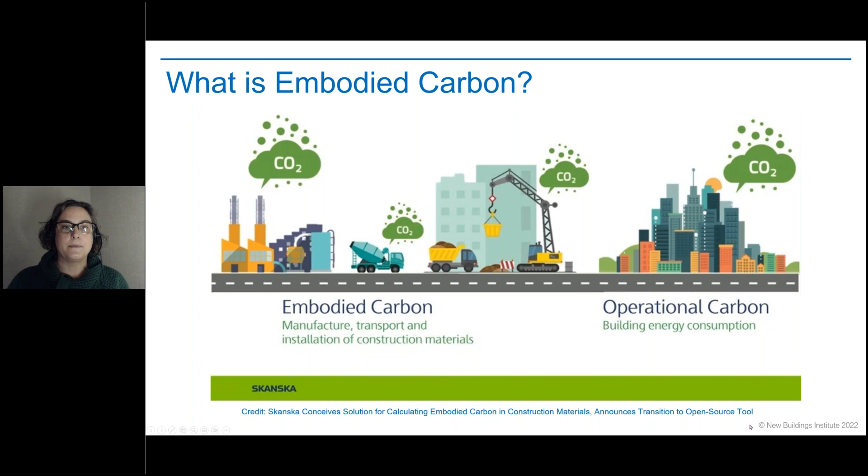So let's jump in. Most of us know that buildings account for about 40% of global GHG emissions. That value includes embodied carbon emissions, which is about 10%, maybe up to 15%, and operational emissions, which is about 30%. Operational carbon is usually pretty well understood by those in the high performance building world.

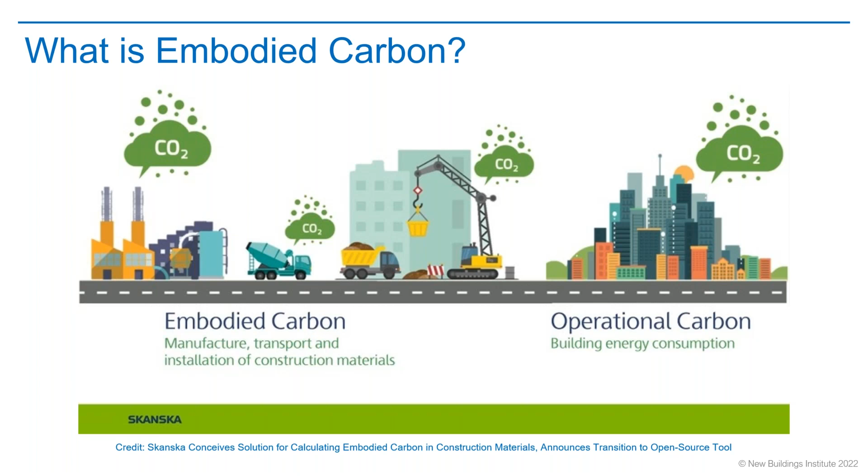Embodied carbon is the sum of all the emissions associated with the extraction, manufacturing, transportation, installation, and end of life of a material or product. So that's the difference between the two.

But when we talk about embodied carbon, it's not just the emissions associated with the development of a product. We also want to consider the emissions associated with installation, maintenance—which could be like refinishing a wood floor or concrete floor—and emissions associated with replacement or product disposal.

This chart uses an EU standard, EN 15978, and shows the carbon associated with all phases of a building's life cycle. This is to show that we're not just talking about upfront embodied carbon, but the whole life cycle. Starting at the top, the stage indicates the stage of life for a building project.

The module indicates the phase within the stage. For example, with a product, there are two stages. In that red and orange, you can see that there are two stages there.

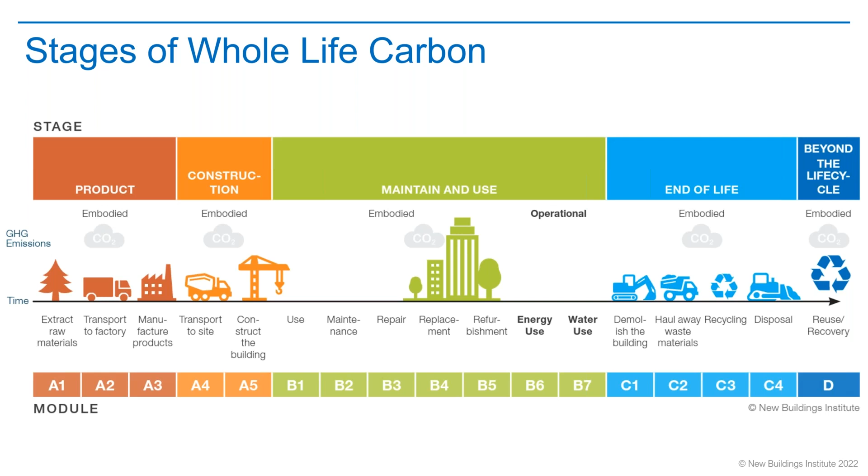You may hear someone refer to a product's embodied carbon measuring the cradle to gate emissions, and this identifies the boundary conditions. It's the same as saying the product stage, or modules A1 through A3. So there are a couple different ways to talk about it, and it's important to be aware that there are different terms out there that mean similar things, and it could be very specific.

So what materials are the biggest contributors to embodied carbon we should be concerned about? Generally, structures make up the largest part of the embodied carbon pie. For those familiar with the book How Buildings Learn, it's a great book, highly recommend it.

You probably understand that within the building's life cycle, there are different components. The structure is replaced the least and the interiors are replaced way more frequently. So we need to consider the life cycle impacts and the replacement timeline, not just the initial products, for a new construction project.

Once you understand that aluminum is essentially congealed electricity, and that bio-based products like wood are lower embodied carbon, you can start to consider lower carbon materials. But we still need some of those high carbon materials like concrete and other metals.

So the text to the right here, we're not going to walk through all of this. This is more for reference. It's a great little resource that provides some actions that designers can take.

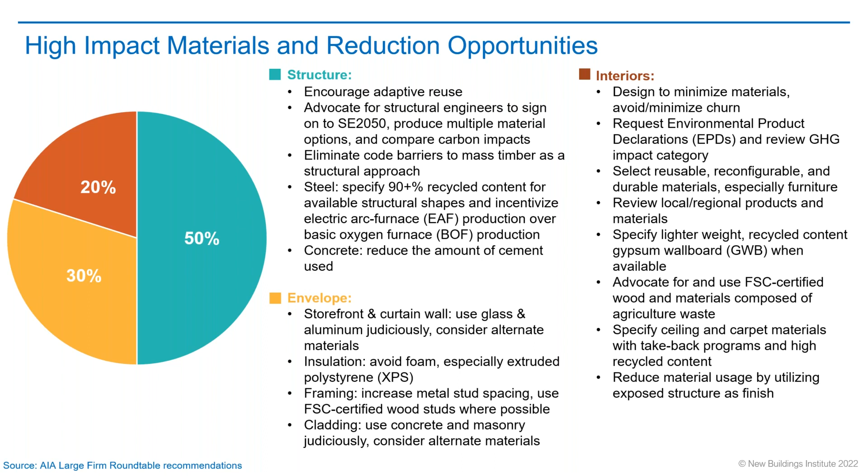So there are 3 things on this slide, but there's one huge thing that's missing, and that's mechanical, electrical, and plumbing. I'll get to that in just a minute.

So this chart from CLF, Carbon Leadership Forum, and AIA looks at operational carbon in 2 scenarios and embodied carbon in yellow. There are 2 different building types in blue. The lighter blue is a code compliant building, and the darker blue is a high performance building.

And code compliant buildings often have a higher operational carbon compared to embodied carbon, where the reverse is true for highly efficient buildings. So when we compare the operational carbon to the embodied carbon, the upfront embodied carbon relates to the construction and occurs at milestones.

In this scenario, we have 0, 15, and 30 years. During the construction and at major renovations, we see those tenant turnovers, so that's why we have more embodied carbon at those points.

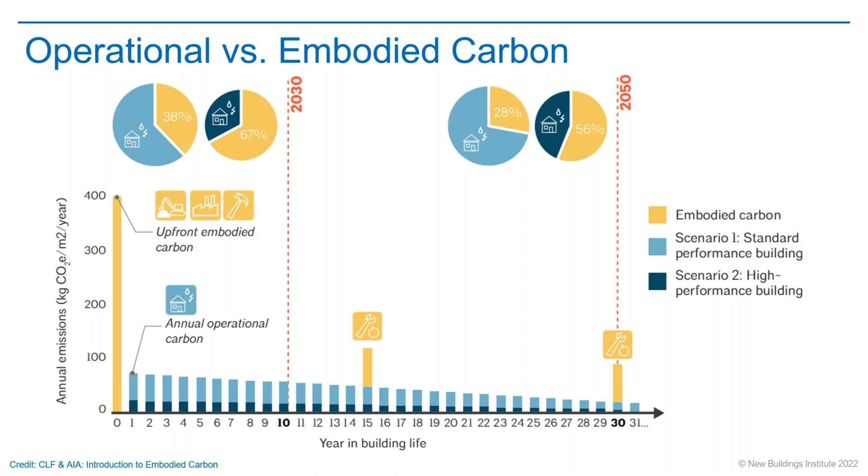Operational carbon is flexible, so it can be reduced through energy efficiency measures by using lower carbon energy, unlike embodied carbon. So as with embodied carbon, we want to address that upfront before we even purchase anything, because we can't really put those emissions back into the machine after they've been released. So we need to address them early.

And regardless of building type, size, or location, there are 2 materials that dominate nearly every analysis, and that's concrete and steel, for commercial buildings I should add.

Steel in the US accounts for about 2% of US emissions and 6% of global emissions. Of the US emissions, about half of the steel goes into buildings, into the built environment specifically. And concrete accounts for about 8% of global emissions, nearly all of which is architectural or infrastructure related.

But when addressing energy efficiency, we always start with the largest energy consuming end uses. It's a pretty familiar idea within high performance buildings. Similarly, with embodied carbon, we want to address the materials that are used the most and have the largest carbon footprint.

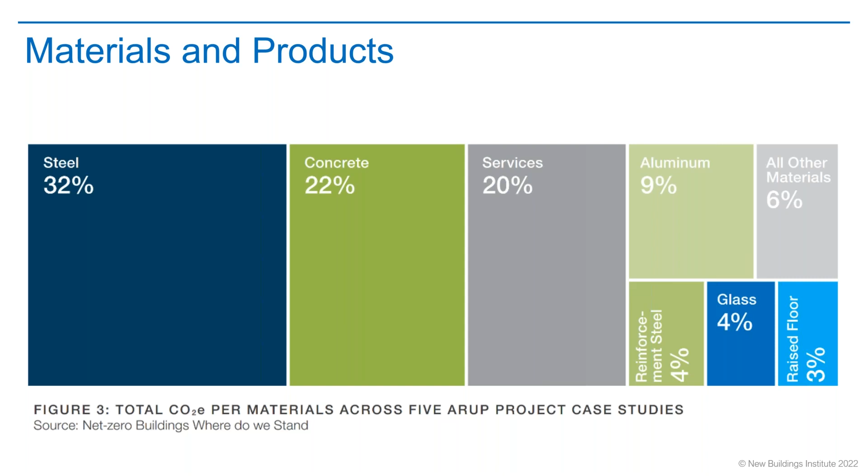So if you're familiar with Buy Clean policies, it follows the same idea. Those are the higher carbon products that are being addressed first. So in California, that's looking at steel, glass, mineral wool insulation. And we'll talk about that in just a moment.

Now, I don't want to pick on any one material, specifically concrete and steel, because they always seem to come up in conversation because there's a lot of opportunities there.

But we have other products like mechanical, electrical, and plumbing, or MEP, that can reduce their emissions either from material efficiency, being efficient with how they design the system itself, and then just by identifying the different systems that are being used.

So this ARUP study—the slide before that I showed was the ARUP study, I didn't mention that—shows that the services, which is the MEP, are about 20% of the carbon emissions of the case studies that they looked at. Other reports show that MEP emissions are about 50% of the embodied carbon on a project.

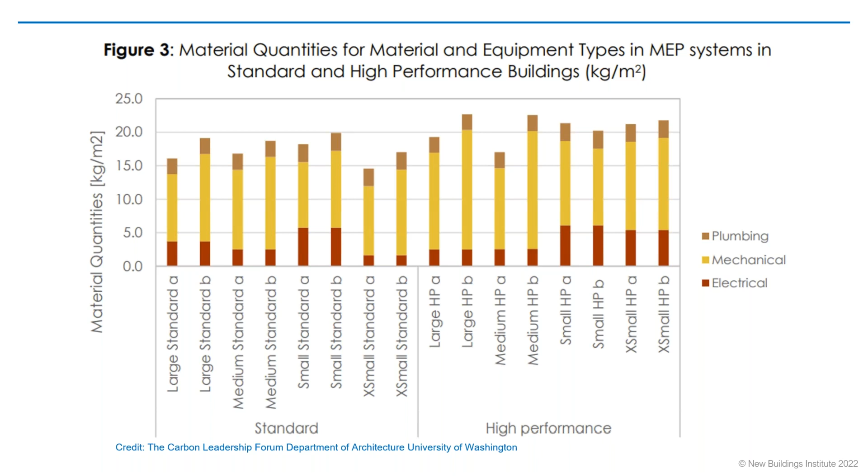This University of Washington study looks at different MEP systems in conventional code buildings compared to high performance buildings. This study didn't look at the whole building, so the values can't really be all encompassing, but they do shine a light that we need to better understand the embodied carbon of mechanical, electrical, and plumbing systems.

So how do we know what the embodied carbon is for each product? It's through EPDs, environmental product declarations, which are the linchpin of all the data standards reporting right now, because it's raw data. It's a summary of the material or product life cycle analysis, and it quantifies the impact of a product on the environment.

They include a lot of different information, not just the global warming potential or carbon emissions from the upfront embodied carbon. But I want to stress that an EPD is really only data. The existence of an EPD does not mean that it meets a specific environmental standard. It's disclosing or declaring its environmental performance, and that's what's important to remember here.

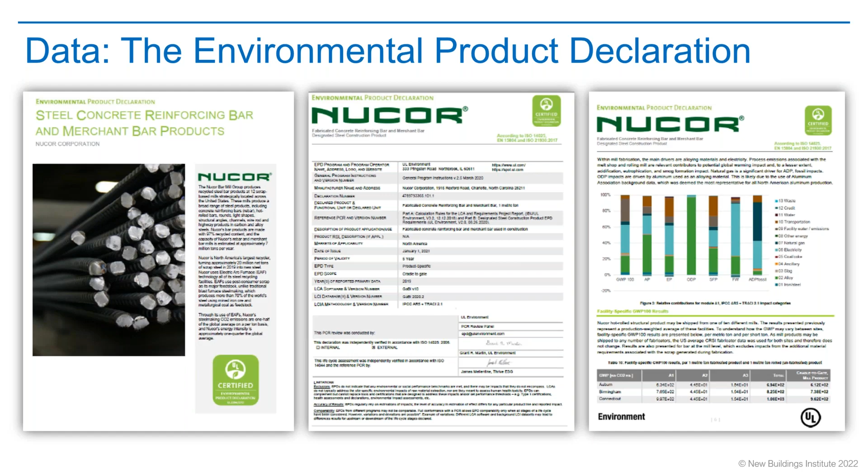So I'm going to quickly look at a couple different policies, because there's a lot of policies taking place, and there's a lot of conversation about what's next here.

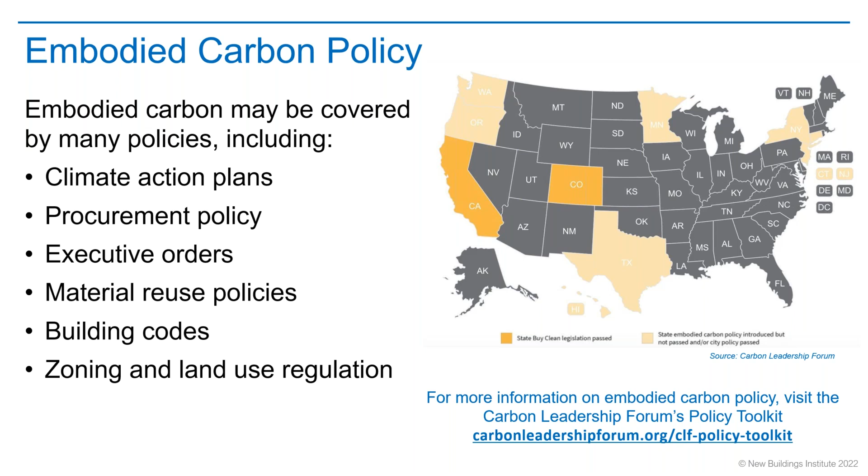This map is from Carbon Leadership Forum, and they have a great up-to-date map that shows the different activities happening around the country. I'm going to show you some California policies in just a second. You've probably heard of Buy Clean — it's a pretty common embodied carbon procurement policy that many states are considering passing. For instance, Oregon's Buy Clean policy passed, but its scope is only focused on infrastructure, not buildings.

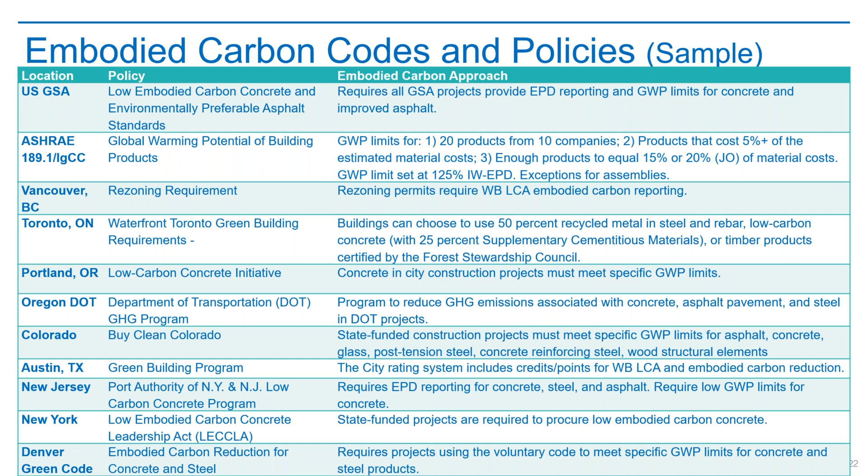Vancouver, BC has a zoning code that requires whole building life cycle analysis for projects that are changing zoning code, while Denver's code is planning to adopt green code provisions. The reason procurement policies and what's happening at the state and jurisdictional level is so important is that 32% of the embodied carbon of construction in the US is attributed to public projects. That's why these policies are moving forward — it's so important that they lead by example.

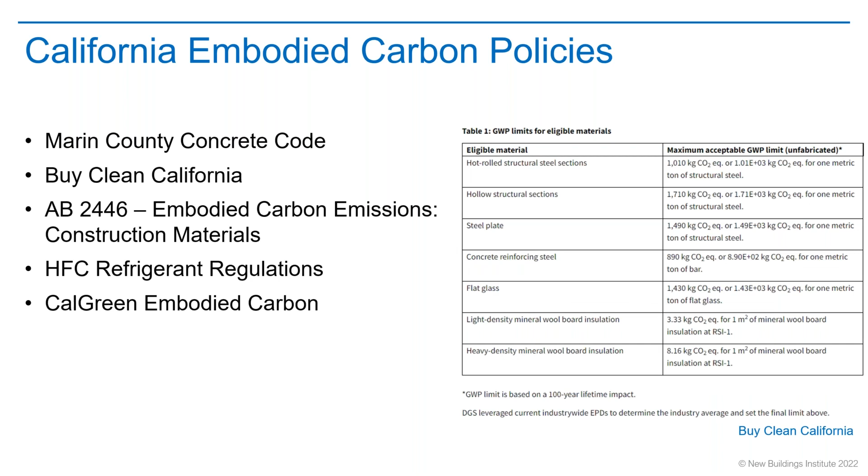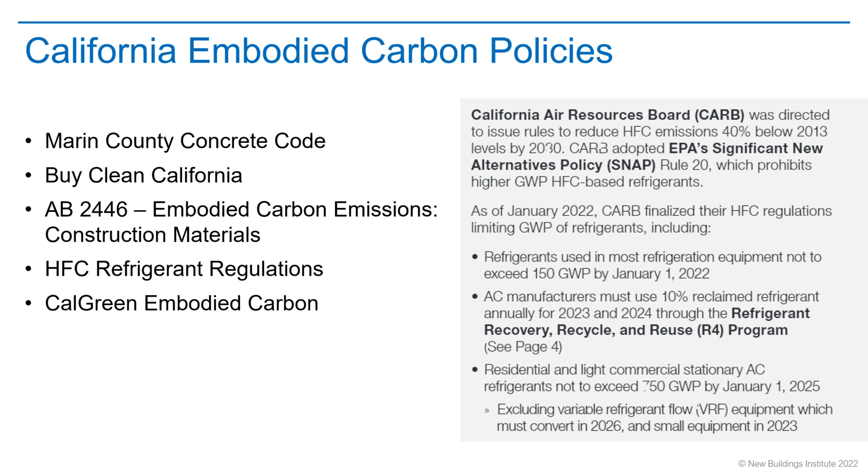I don't want to leave refrigerants out of the conversation. There's a lot going on with the California Air Resources Board around that — they've been directed to reduce the global warming potential of specific refrigerants. So we'll be seeing a lot more there.

So looking at building reuse, whole building life cycle analysis, or using a prescriptive approach that is pretty similar to what we see in Buy Clean California.

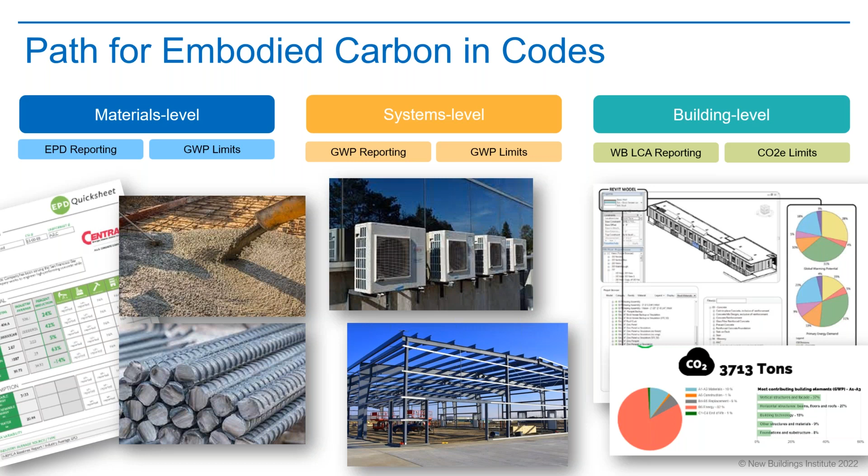The reason codes are important is because we want to work within existing regulations, and the building code includes requirements for materials and can address embodied carbon requirements just as it addresses other requirements. So we can look at embodied carbon in the code in a few different ways: at the materials level, similar to what's happening with Buy Clean; at a systems level, looking at just the structural system or the envelope; or at the whole building LCA level.

So all of this is kind of exploding right now, which is really exciting. The Inflation Reduction Act is a federal law that allocates billions of dollars over many years, including millions of dollars to support the development of low carbon products. There's also going to be unprecedented funding to support manufacturers to create EPDs and low embodied carbon products.

Most notably, there is $250 million allocated for an EPD assistance program with funding available until 2031. So there's billions of dollars going into this, and it's really exciting time to be involved with embodied carbon, and having this transparency on our products is going to be really important to have these high performance, healthy buildings.

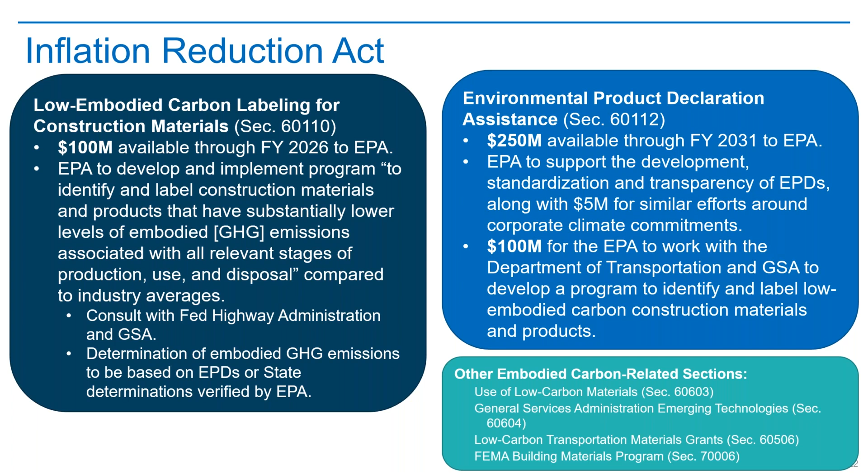So from here, I am going to hand it over to Brandon to talk more about concrete. Thank you, Webley.

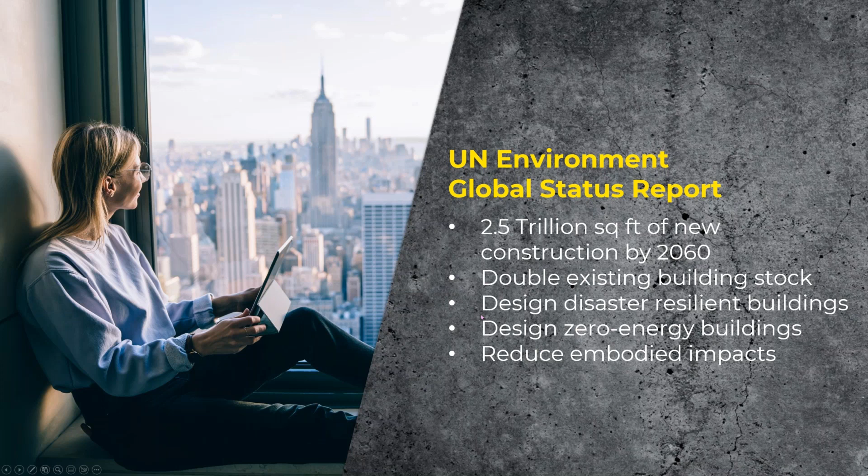As it pertains to concrete, Webley did mention that cement production globally contributes about 8% of global emissions. It's important to note there are a few variables here, most specifically the unit rate of impact and the volume. On the volume side, concrete is the second most widely used material on Earth, second only to water, which is an amazing figure to comprehend. But the goal is not to erase the use of concrete, but to use it wisely and efficiently, and to really put our best foot forward with reducing the unit rate of impact. So when we talk about reducing the global emissions from this, it's really about using it smartly, with everyone coming together to put forward the best practices.

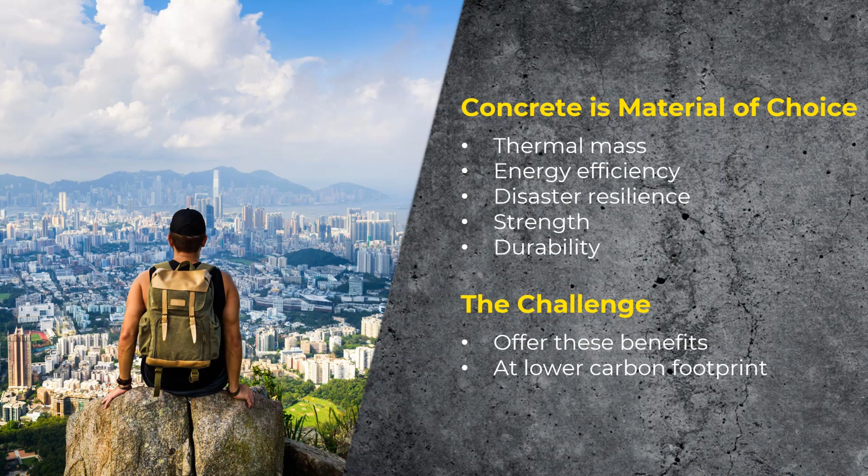Ultimately, because of concrete's thermal mass, concrete has been the material of choice for energy efficiency—it absorbs and desorbs heat energy and helps normalize building energy demands. And because of its strength and durability, it has also been the material of choice for disaster resilience. So ultimately, the challenge is going to be to offer all these benefits, but at a lower carbon footprint. Building materials and construction have a global impact of about 11%, which was highlighted earlier—it's also cited by Architecture 2030. But when it comes to concrete, we just need to put our best foot forward.

So before getting into some strategies, I just want to highlight the road that NRMCA itself has gone under—how did we get here? NRMCA started our journey towards carbon neutrality in 2009 by adopting a carbon reduction goal of 30% by 2030, among other impacts such as energy use, waste, and recycled content. But that was the initial focus and initial goal.

Come 2012, we became an adopter of the Architecture 2030 Challenge, which basically states a goal of 50% reduction in carbon footprint by 2030, followed by an embodied carbon neutrality goal by 2050. So that was a goal we adopted in 2012. Ultimately, the Architecture 2030 Challenge did emphasize the use of life cycle assessment and environmental product declarations for measuring progress, because you can't reduce what you don't measure.

Following this, we launched our EPD program and published benchmarks for carbon footprint reduction, or just carbon footprint monitoring, I should say, in 2014. We are an independent verifier of EPDs. These benchmarks and EPDs are routinely updated and allow for tracking of projects. And as I previously mentioned, you can't reduce what you don't measure.

So this is an area where we see the potential benefit of funding from the Infrastructure Investment and Jobs Act and a few other things, where we can actually be a resource and a conduit for managing those funds and helping producers and other entities get access to EPDs, specifically for our members. Because even though we do have a lot of EPDs, there are still a lot of places throughout the country, and even within certain markets that have a lot of EPDs, where smaller producers don't have them available to their operations. So being able to facilitate the advancement of those as well.

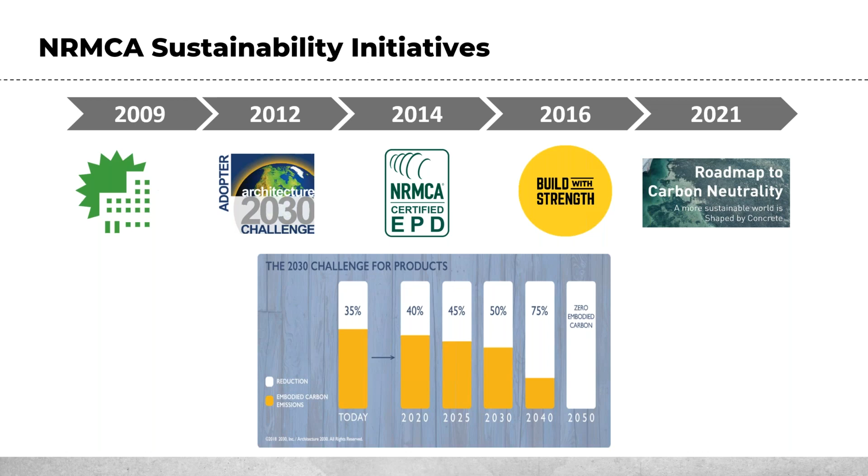So on the progress side, between 2014 and 2021, like I mentioned, we started establishing EPDs and tracking progress in that time period. So over that 7-year window, our members had reduced their embodied impacts by about 21%, which is great and in line with our goal. Throughout that time, we've generated about 40,000 EPDs, which is kind of an amazing figure.

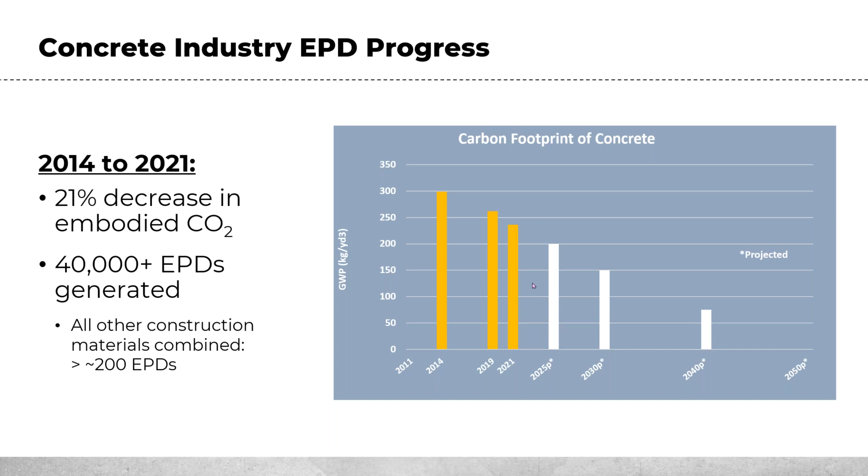Every concrete mix design essentially can have its own product-specific EPD. There are so many different formulations. There's not just one singular concrete out there. And as a comparison among other building materials, I believe all the other building materials combined have in the realm of about 200 EPDs or so. Just a general figure there, to give some emphasis on the magnitude. But as you can see, we're tracking progress to get towards that goal.

Some other things that have gone on specifically in the state of California: California Senate Bill 596, which is basically the first bill focused on any particular sector to help facilitate the industry moving towards net zero emissions. This was enacted with huge support and contribution from the cement and concrete industry, really focusing on decarbonizing cement and the steps to get there, because it's important to note that it's not necessarily as easy as flipping a switch.

And I'll just read a few lines from that bill really quick, to highlight the intent here. It emphasizes that the climate emergency is an urgent threat in all aspects of life, and more specifically, California's cement and concrete industry is well positioned to lead and accelerate commitments to achieve carbon neutrality.

And this really stems from the idea that there is a wide range of commercially available technologies and practices that exist right now to reduce and remove emissions. But these technologies and practices face a series of market and regulatory barriers that hinder their deployment. So this is really focused on aiding that push and pull on advancing these technologies and getting them into the market and being used.

And as I mentioned, this was largely championed by our partner association, the California Nevada Cement Association. This is just a quick snippet from a document they have on their website. I encourage you all to check it out, but it's really identifying the 9 levers needed to work towards achieving carbon neutrality in cement, and identifying critical areas of support and progress needs, whether it be legislative assistance, regulatory assistance, or funding and R&D. So we have these outlines and maps set up, and we're all working towards it.

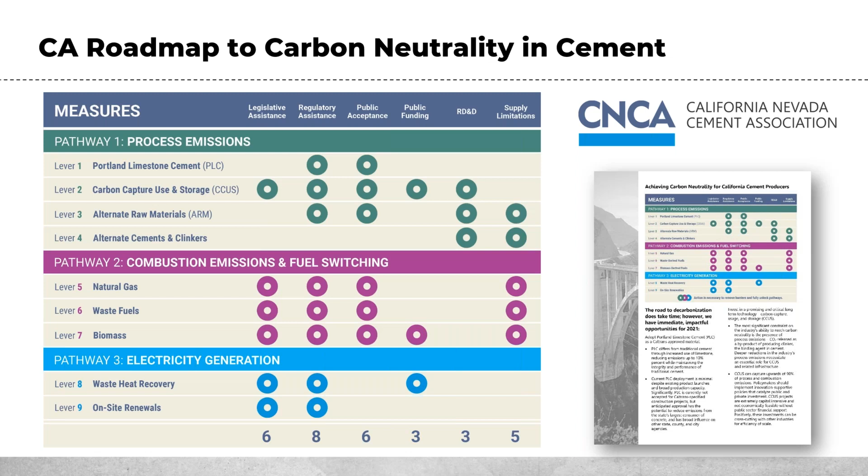And another quick highlight, looking at California-specific emissions and where they all stem from. So identifying the different sectors, from transportation to industrial, and then looking at them broken down into smaller factors. I just really want to emphasize, this is not trying to downplay any particular category or material. The cement figure there of 2% of California's emissions is one factor that comes into play.

But what really we want to do here is highlight the fact that it kind of takes a village, that mindset of it takes a village to achieve the goals that we set out before ourselves. And so we need to make sure that we're doing everything we can within our scopes of influence, but also seeing how we can beneficiate and help the other scopes as well. And so with concrete, I'm going to touch on a few things where we talk about improving operational energy needs and demands, and a few other things as well.

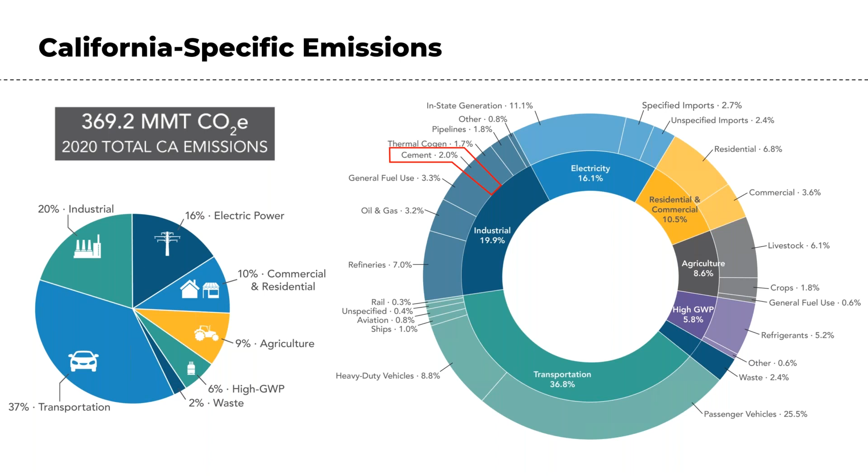So strategies now specifically: interestingly enough, there are a lot of solutions involving concrete that have been around for decades. And when I say that, a lot of people are kind of surprised. They are tested, researched, and ultimately tried and true in nature. They often have original intents that were for beneficiating concrete in other aspects, such as improved durability or increasing efficiency. Ultimately, though, concrete is a lower margin industry, and motivation to change things up is really kind of on an as-needed basis or specific design intents where sustainability might not be deemed important. And so this is looking back over the past many decades.

Fast forward to today, though, and we find that sustainability is a huge focus and is a primary contributing metric when it comes to projects. That's where we kind of move forward with these technologies and research and opportunities to better our built environment. So we need to create a design environment in which we're accepting of these means and methods and essentially pulling them into focus. This is going to be paired with a push from producers and manufacturers and technology developers to further advance these materials and technologies.

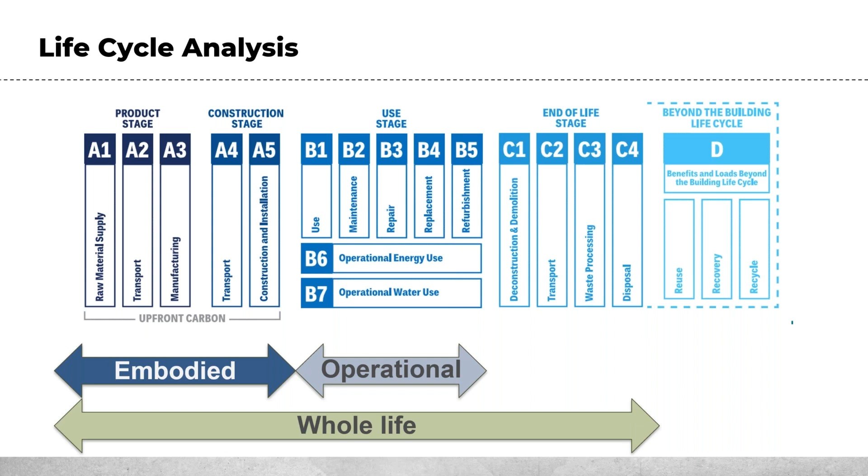So on this next slide for life cycle analysis, I'm not going to go into depth here as this is already covered by Webley, but I just want to highlight the three different stages of impact. And concrete does have a role in all of these stages. It's always going to be important to look holistically at a project when quantifying impacts, because a fun little analogy I like to use is with electric vehicles. Manufacturing of an EV is heavy on the front end of the product stage compared to an internal combustion vehicle, but after around 20,000 miles of use or so, there's a net benefit that comes to light. And so with concrete, we want to do everything we can on the front end to reduce its impacts and make sure that we're capturing and improving the operation on the whole life perspective.

So where can concrete come into play with this? First, on the embodied side, concrete is largely a local material. Water, sand, aggregate, all these ingredients make up about 85 to 90% of a concrete mixture by weight. And the process to manufacture and procure these materials really is local and minimizes transportation to the construction site, as it is a local material. So the amount of embodied carbon in concrete is primarily a function of the cement in the mix. Therefore, one of the most effective and immediate ways to reduce the embodied impacts of concrete is to increase the use of industrial waste and byproducts that replace a portion of the cement within concrete.

Ultimately, as cement is the most expensive ingredient, this is a relatively easy thing to do. You have to monitor supply and availability and whatnot, but it often results in net benefits to sustainability at negligible cost impacts. And some of these waste materials can be fly ash from coal-fired power plants, slag from steel manufacturing, biochar from wood waste, and also municipal waste, just to name a few. And we'll touch on some of that a little later, a little more in depth.

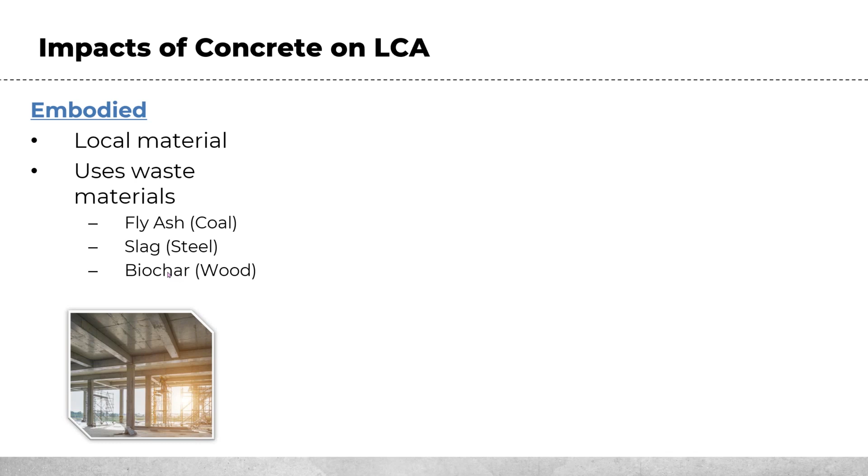Next up is going to be your operational. So your use stage benefits of concrete can include things like the thermal mass, beneficiating energy demands and energy curves, both in magnitude and timing. I kind of touched on that. And also just the overall aspect of it being resilient and durable in nature. That's just kind of the nature of concrete, and it will reduce maintenance needs while also increasing the reliable longevity of the building.

And lastly is going to be your end of life benefits, which include carbon uptake, where concrete will actively absorb and permanently sequester CO2 from the atmosphere throughout its life. This is a phenomenon called carbonation. Won't go into depth here, it's a little bit of chemistry, but overall concrete does absorb CO2. Also, at the end of life, concrete can be crushed and used as an aggregate for certain percentages and certain classes of mixes back in concrete, and also used as a base material as well.

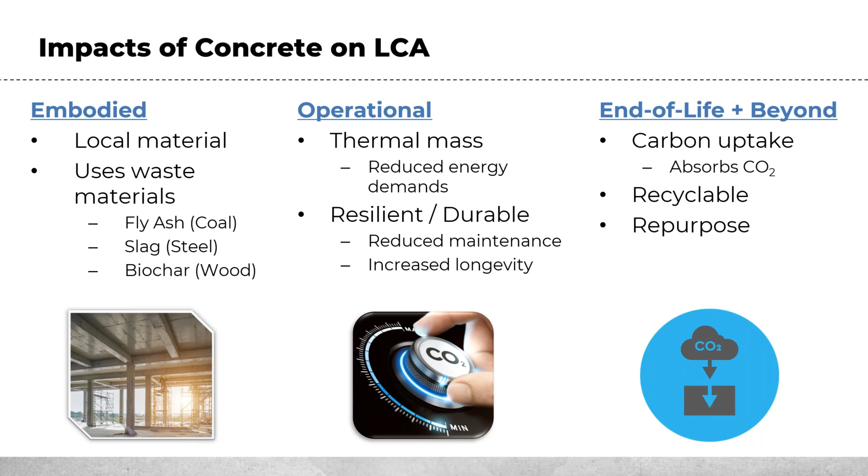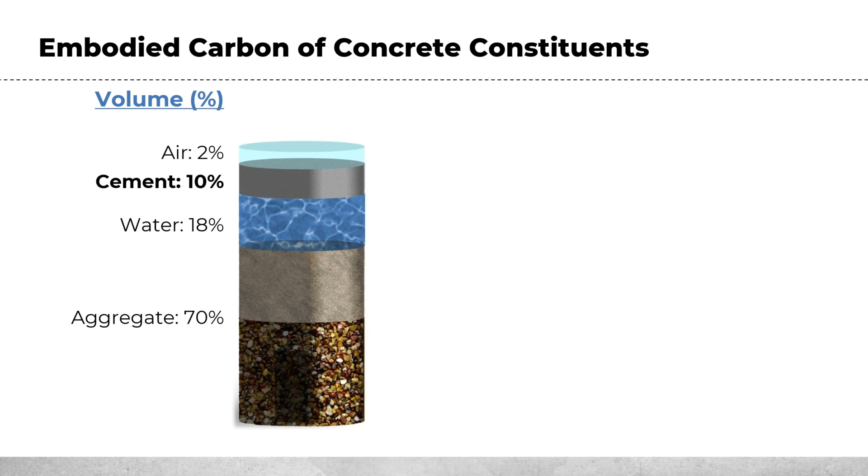So the embodied carbon of concrete constituents, looking at where the impacts are: when we look at the constituents themselves in a concrete mix, an interesting observation can be made. As an example here, we see the ingredients for a typical 4,000 PSI mix with no supplemental cementitious materials. Notably, you'll pick up on the fact that aggregates take up about 70%, or the largest amount of material, within an actual mix. But when we look at the carbon impacts of these ingredients, we're going to see that cement kind of stands out as having an impact of around 85%.

So despite being 10% of the volume, it has an impact of about 85%, which is overly weighted towards the cement ingredient. So as you can see, cement manufacturing and usage is the primary contributor to global warming potential in a concrete mix. And offsetting the use of traditional cement is going to be a plug-and-play solution to reduce emissions.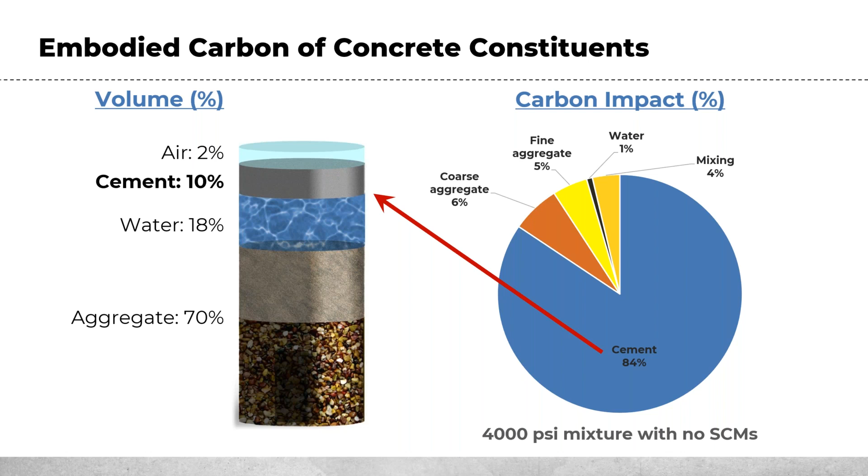And this is really the beautiful thing about concrete specifically. Much like the proportioning and baking of a cake, there is just not one single recipe or way of doing it. And our industry is unique in the ability to use a wide range of materials while also already having the performance standards and code infrastructure to ensure their performance and allow their usage. So here we'll get into a few of those strategies a little more specifically.

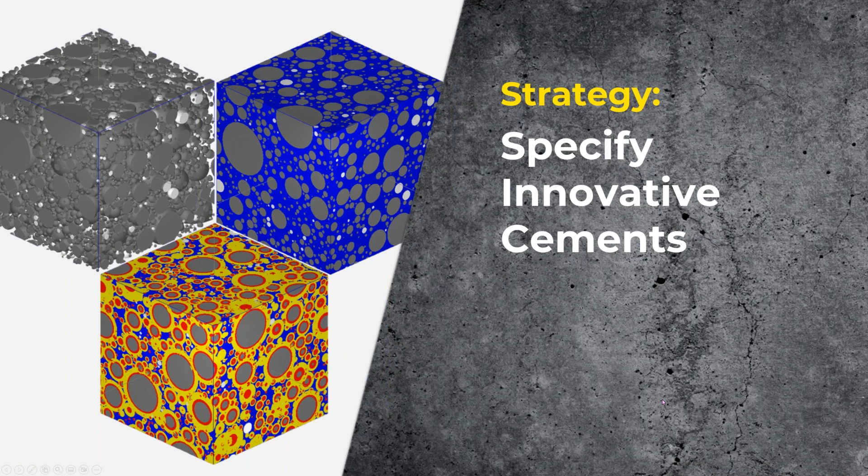Here we look at reducing the cement's carbon impact, and this is just done through using innovative cements, as we previously mentioned in terms of cement having the largest impact. How is it accomplished? Simply the use of ASTM C595 for blended cements. This is compared to your traditional ASTM C150 cement, which is your everyday cement that has been used for quite some time.

I won't go into too much detail, but basically there's an ingredient within cement during its manufacture that is the carbon intensive portion of it. It's not just the burning of material, but also a chemical breakdown of material. And what we want to do is basically reduce the amount of fired and processed material, which will directly translate into a reduction in carbon emissions.

So there are several blended cements that combine OPC, or ordinary Portland cement, with other materials. The most common is going to be your Portland limestone cement, often called PLC, which is basically your ASTM C595 Type IL cement. And this is becoming more and more prominent within the market, as I think 48 out of 50 DOTs have officially accepted it, and production is more or less transitioning to be the primary material.

But this basically combines about 5 to 15% of limestone interground with the traditional Portland cement. And basically what it does is it reduces the impact by about 10% or so. And it's important to note here that we're not watering down the cement. It's more or less producing an engineered material that basically behaves and performs the same.

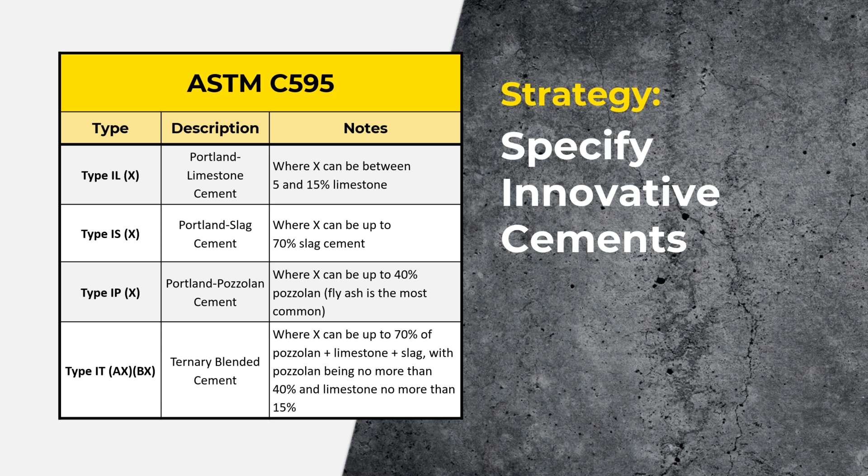There are other ones on here as well. You'll see Portland slag cement, Portland pozzolan cement, and ternary blends, and they're available in certain markets, and they should be used whenever possible. But the important thing here is really to highlight the fact that we want to be accepting of the standard, and if your specification says, hey, C150 cement is what's allowed on the project, you're not going to get these innovative cements that are basically plug-and-play solutions to reduce your impact.

And this is a good little visual here of what we're talking about. So on the left there, you see the Portland Cement Association's national industry-wide standard impact, compared to the two in the middle there, which are California typical cements for your ASTM C150. And then going into the blended cement, you can see a 10% reduction for the Type IL.

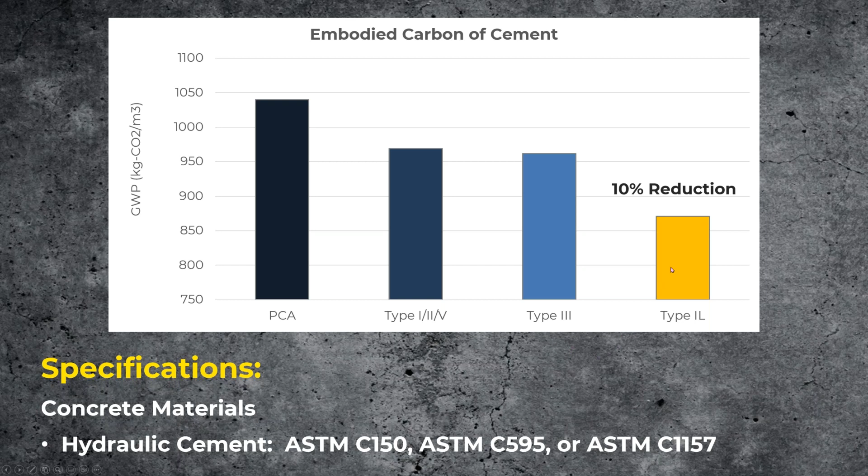So next up, just specify supplementary cementitious materials. If you're a designer or an engineer on the call, you are somewhat familiar with this already, because most concretes these days already do have SCMs, as we call them, as part of the mix design. These are typically going to be your fly ashes or your slags or silica fume, but there are other things as well, like calcined clays and volcanic ashes and ground glass. Overall, most of these are either going to be waste byproducts of other industrial processes or naturally occurring materials that require little processing and therefore have smaller carbon footprints.

Important to note here, all of these materials do enhance the performance of concrete. So again, we're not watering down the concrete, we're actually improving it. And a lot of those standards I mentioned before in terms of being tried and true and researched and put into practice for many decades, they were done with this in mind for improving durability and efficiency of concrete, but now we're more or less leveraging and pushing them forward largely on the sustainability side.

And a good visual here of the impact of SCMs on embodied carbon, just looking at a 6,000 PSI mix at 28 days, 100% cement versus 50% replacement versus 70% replacement. You can see very similar corresponding reductions of 45 and 60%. We understand that you're not going to blanketly put 70% into your concrete mix for all applications, whether it's supply limitations or constructability limitations, but you should always be surgical in your approach and use them whenever they're available. And as mentioned, they all improve the performance of concrete from reducing permeability and improving durability.

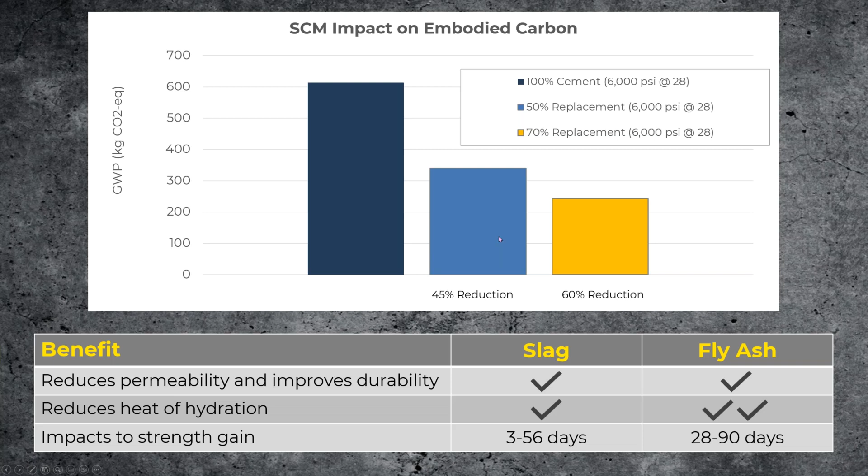But they also all have longer strength curves as well. So it's important to note that when you're designing to allow for, say, 56 days instead of 28 days, because one thing I like to highlight is we look at these replacement mixes, okay, there's 6,000 PSI at 28 days. Technically with SCMs, the reaction takes place over a longer period of time. So this 6,000 PSI is actually going to be more like 7,000 or 8,000 PSI at 56 days. And so you're going to be even further over designed. So you can incorporate these materials with adjustments to their strength development time, and it only further advances this reduction beyond even that 50%.

And this one is really just quite simple. It's just a matter of listing the standard, but not limiting the quantities that go into the mixes themselves.

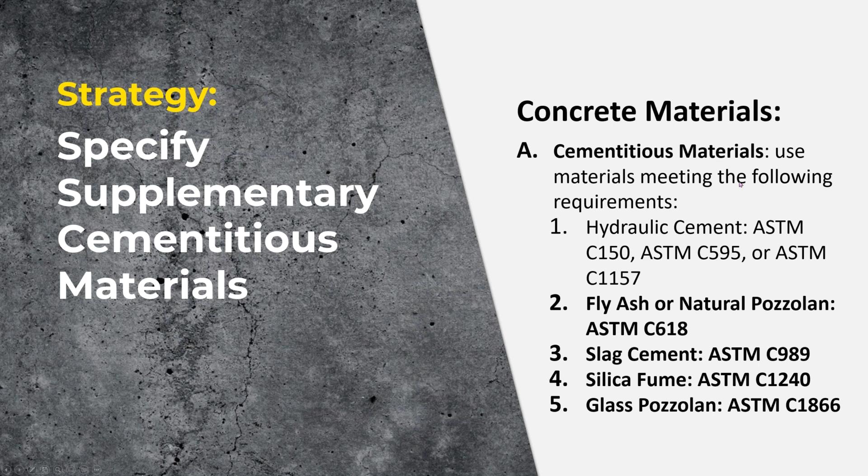And next slide here. Last, just to close this out, is just don't limit ingredients. So this covers things such as maximum water to cement ratio, minimum cement content, or maximum SCM content. All too often, there's seemingly random limits on material ingredients in project specifications, and this really hampers the ability of the producer to meet performance criteria as well as cost and carbon footprint criteria. So it's important to not incorporate these things unnecessarily. Now, there are going to be cases where you do need these, whether it's for design and durability needs. And if that's the case, they should always adhere to and follow ACI 318's code-based exposure classes, but they shouldn't be blanketly applied.

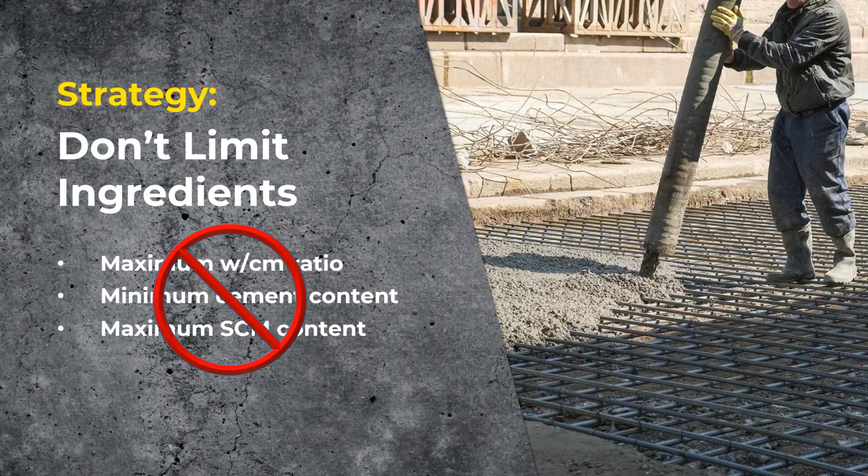I think now I'll hand it over to Luke. Luke, you may be whispering. Luke, are you on mute? Sorry, the headphones must have come out. Hello. We can hear you. Can you hear me, Brandon? Yeah, I can hear you. Okay, there we go. All right, we tested all the audio and you'll always have, I guess, hurdles. So I'm going to start over.

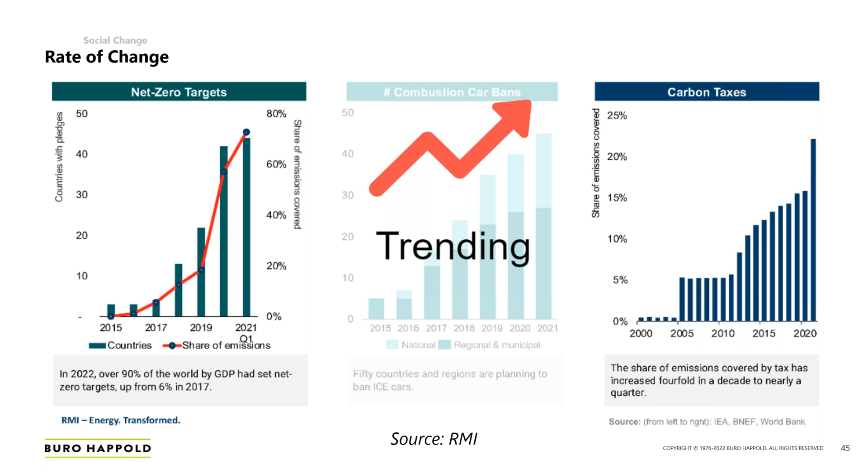So I'm going to start with this presentation, or published report recently from RMI, that I got a lot of optimism from, that talked about change being nonlinear. And it reminded me of that quote, 'Never underestimate the power of a small group to change the world.' And as we're starting to push embodied carbon change in the industry, I think we're starting to hear this topic more often.

And just the fact that we're having this webinar is an indicator that things are changing. We're seeing that too in things like EPD development, and it's exciting to see some of the policies that Webley mentioned, and things like the Inflation Reduction Act will only add to this momentum.

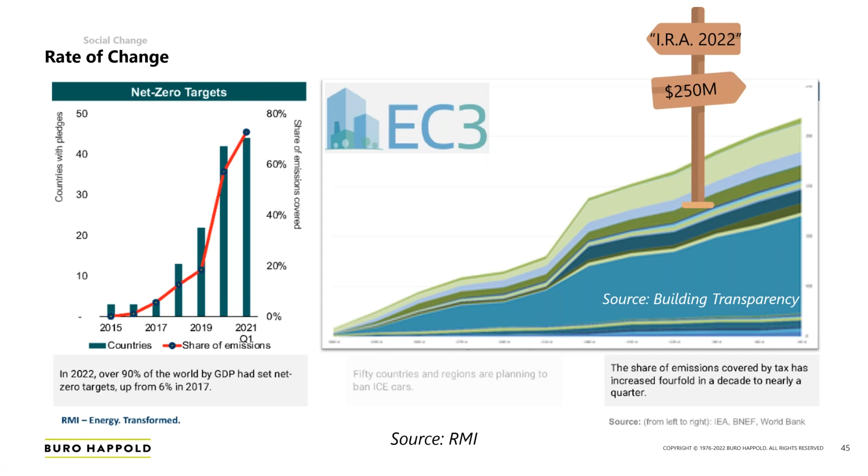And having interactions with Webley and others around the Cal Green Code, and exchanges with Brandon or local ready mix suppliers, got me really thinking about what I'm going to call this nexus of public, private, and policy. I'm very much not a poli-sci person—I'm an engineer—so there's a very simple diagram.

But what I want to make a point of is we're part of this complex system, complex ecosystem. It's like that push-pull that Brandon mentioned, and with each one of these sectors, and with many groups kind of influencing them, we start to set precedent for each other. There's no linear process, but rather we're able to make progress by each one kind of showing precedent.

As for example, private sector, we can't just demand policy. We have to show that we're prepared for things like whole building LCA and indicate to policymakers that this is something that we're ready for.

An example of that, I think, is what we mentioned, the Buy Clean Act. In California, public projects now have to meet global warming potential limits, and this has indicated to the industry that we need to change, we need to make common practice development of things like environmental product declarations.

And seeing folks in the public sector also reacting to this—the GSA has been a big indicator, they've started publishing also concrete limits, and as the biggest purchaser in the country, that sends a market signal that then can also be picked up by private projects.

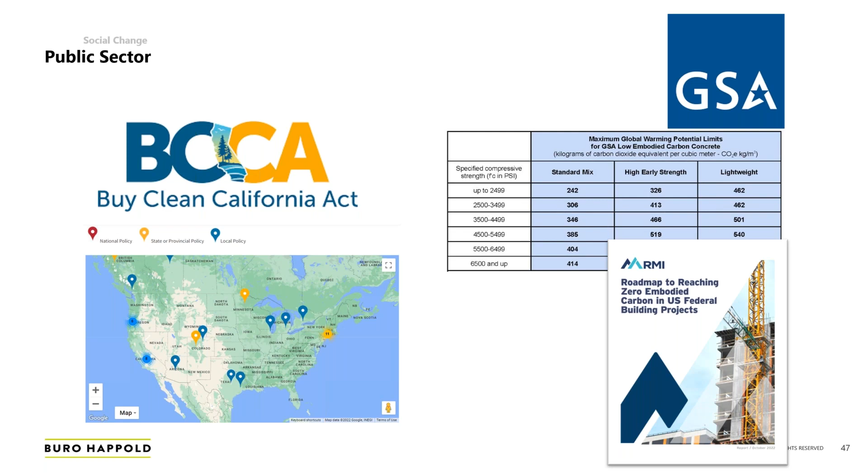And the importance is really setting and sharing precedent. I also want to give a shout out to Anish Tilak, who we've all been working with on Cal Green as well, and recently published work around a roadmap for reaching zero embodied carbon structures in federal projects. This is also kind of a next step in creating precedent and looking at setting limits for LCAs and things like that, that then we can continue to talk about.

And that's, I think, the biggest takeaway here—there are many groups starting to form, and I've highlighted just 2 here, but sharing precedent is really key. If we're going to meet any of our climate targets, it doesn't matter if we have one project that's good, we need broad adoption.

And the biggest thing that we can do in this climate transition is to talk about it—talk about embodied carbon, meet other people who are interested in embodied carbon, and find those different avenues in our complex ecosystem to make changes on our project.

Just to highlight a couple things, SE 2050 is a program that started just 2 years ago and now has over 100 signatories, and many people publishing lessons learned in their embodied carbon action plans—I'll get to that in a sec too. There are lots of other organizations depending on what kind of practitioner you are, and for that I would just point to the CLF, who does a nice summary of everything that's going on quarterly.

So how are we actually adapting to our future needs? For this, again, I'd rely on the model that SE 2050 has, which is every signatory firm has to publish not only whole building LCA data to a central database, but also their plan for and lessons learned for embodied carbon.

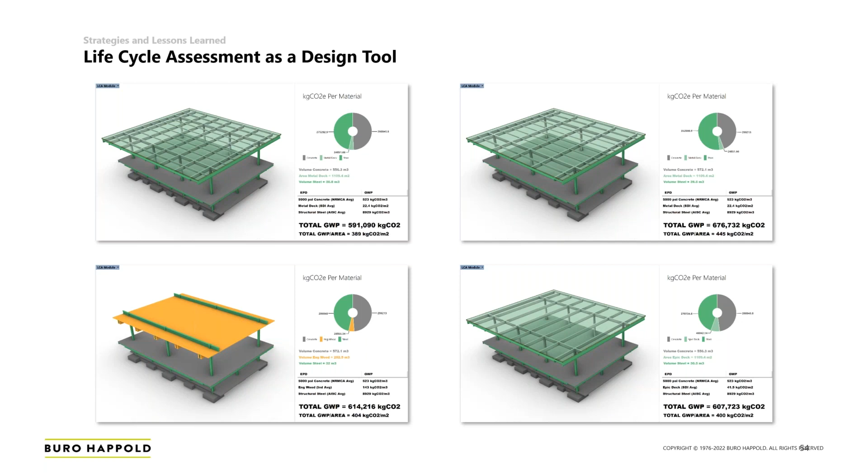I think it touched on a little bit earlier in this presentation, but the key for this is really communicating early on in design with owners, with architects, the vision for the project and which variables we can adapt so that we can find greater optimization and look at minimizing material, minimizing high impact material. And one main point that I want to make is that we found that a lot of times when you're looking at optimizing material, it also is correlated with lower costs.

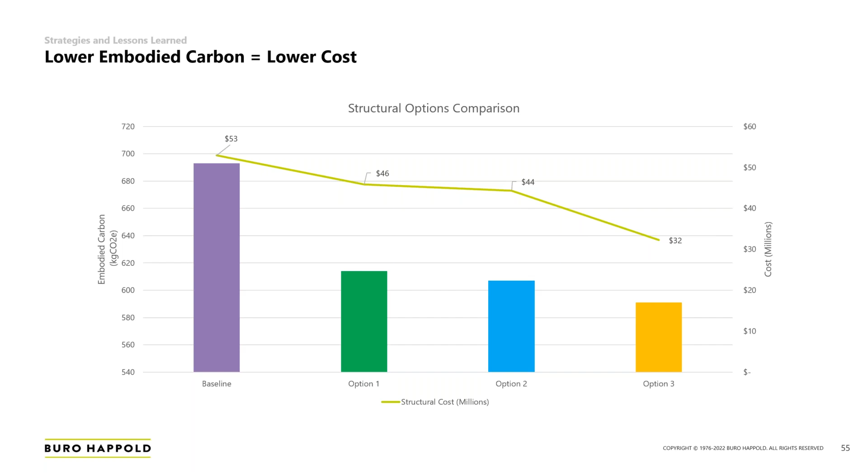So finding the avenue and talking points that are aligned with decision makers on your project, I think, is key. If an owner isn't interested in embodied carbon, talking about costs may be an important thing. And having a relationship with the GC to talk about costs can be key in having a successful project.

Another part of LCA is just identifying the hotspots of where we should focus the most attention. From doing these studies, we know some high level things, like the structure is one of the biggest components, and as Webley talked about, of the structure, the floors are the biggest single design component because there's so much of them. But not just that, we also know the foundations are a pretty significant component, and with that, we often have more influence over that aspect of design.

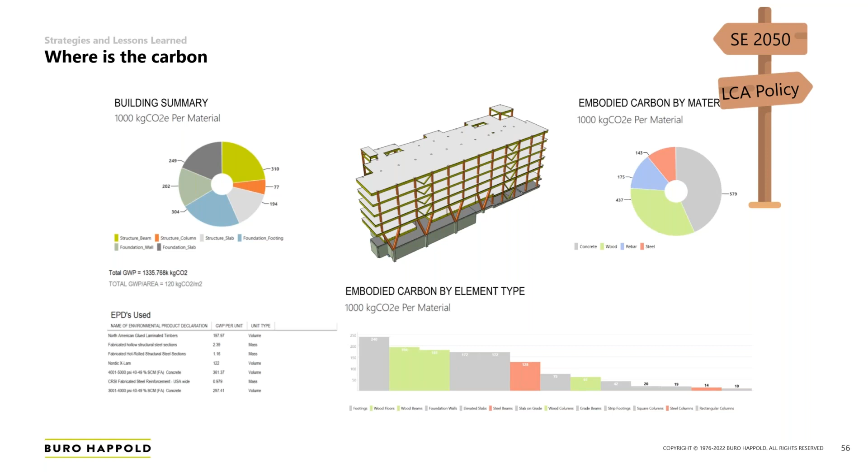And also just to flag that by doing these LCAs, I think we indicate to the industry that the practitioners are ready for whole building LCA policies, and this can also feed into that nexus of public-private policy development. But talking about foundations leads me to talking about concrete, and Brandon did a great job of covering most of this. That NRMCA top 10 list is a really good resource.

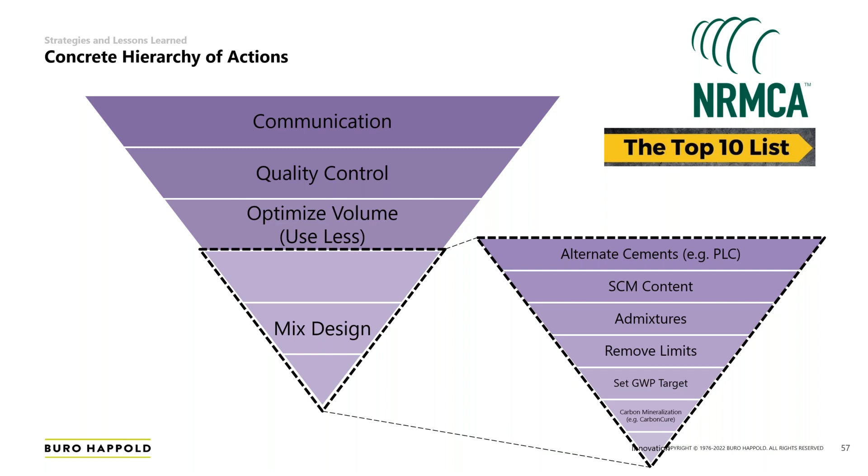But I just want to reiterate a couple of things, and that is mainly around communication. One of the biggest strategies that we're seeing is moving towards performance-based specifications to really communicate what's important to each discipline and allow each party or representative to optimize their system. So as structural engineers, we care about strength and durability, and we can alleviate some of the pinch points for ready mix suppliers in making the most effective mix design.

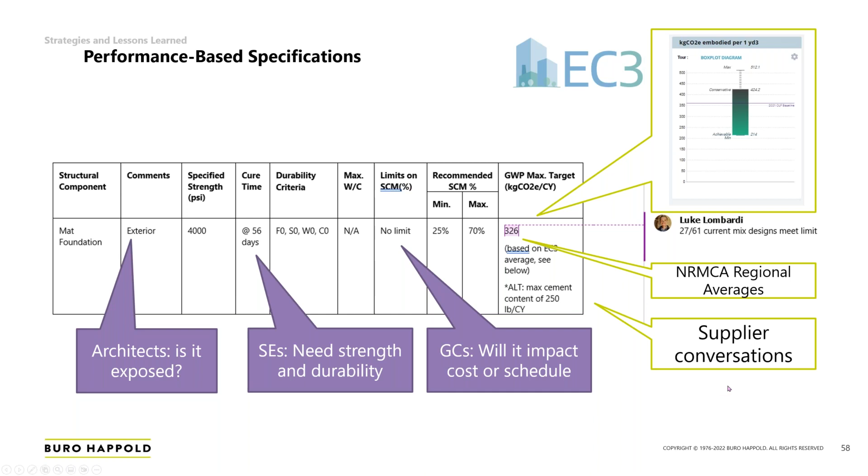And a big point of discussion on this is what should that limit be. I think right now there's a number of ways of looking at that. You can use existing data. I highlight EC3 as a great resource to compile what's available, but there isn't data everywhere. So you can also look at NRMCA regional averages. I think these are looking to become more granular in the next year or so. But the biggest one I would say is actual supplier conversations. Talk with local ready-mix suppliers and build those connections.

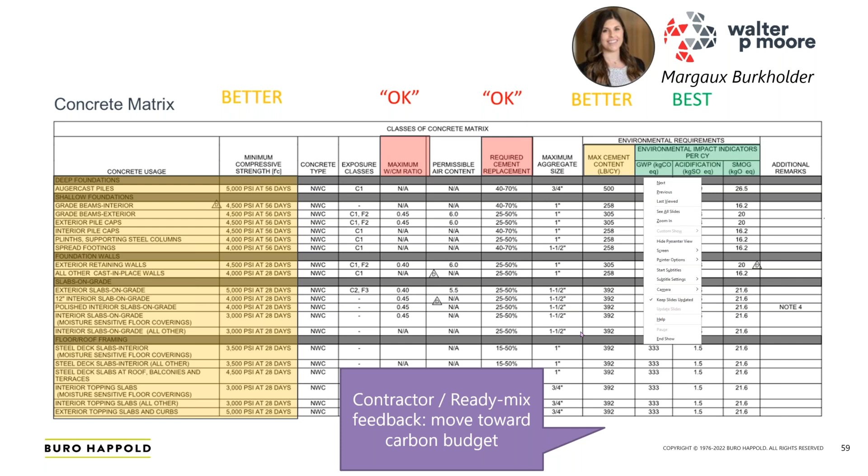And I just want to highlight what this looks like on a bigger project, the work of a colleague of mine in Los Angeles, Margaux Burkholder at Walter P Moore. This is a big stadium project, and you can see that there is some compromise in doing this. It might not be the best embodied carbon solution, but it's better than not doing it at all. And just to highlight one other strategy, from industry feedback, is moving towards carbon budget limits rather than individual limits by mix.

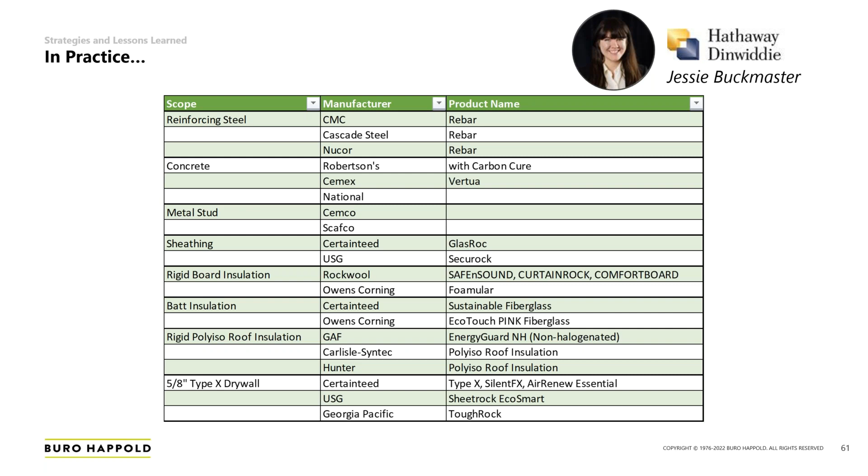For the sake of time, I have to skip through this a little bit, but I also want to say having a contractor on your side is critical. We've had issues where embodied carbon strategies haven't been implemented because if you ask later, it can lead to change orders and be a cost problem on the project. But another one of my colleagues I want to highlight, Jessie Buckmaster, was able to find cost neutral, low carbon alternatives for all of the products on this list, with the exception of drywall, which was a 0.1% increase.

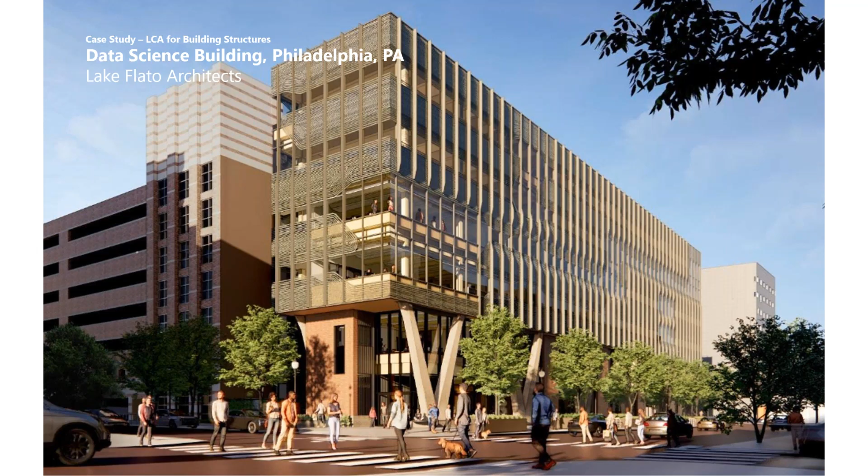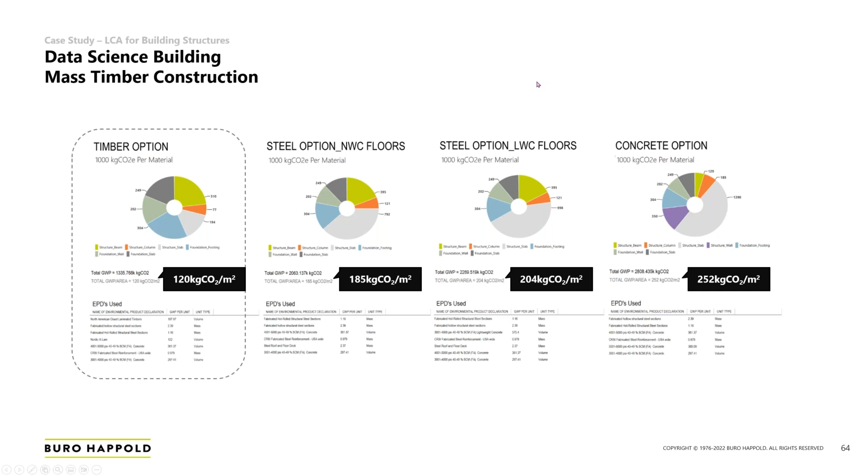Anyway, again, very optimistic on the content here, but gonna fly through a couple of quick case studies. This one comes from Philly. It was a university client, so they had sustainability goals. We worked with Lake Flato, who's also a big proponent of sustainability and embodied carbon, on looking at different scenarios and relative performance early on in design. Ultimately, a mass timber project was selected, which is exciting. I believe it was the first mass timber project in Philly.

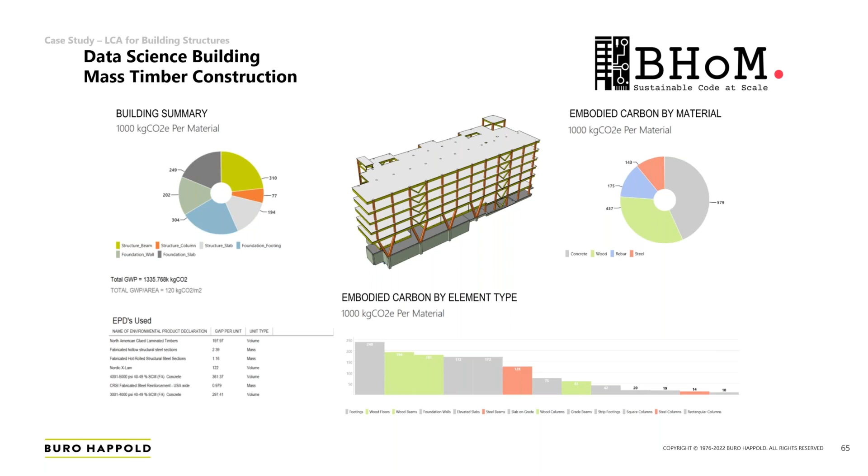And throughout this process, we used our open source tool, the BHoM. If there are any Grasshopper users, this can be a real good way to do LCA and communicate results.

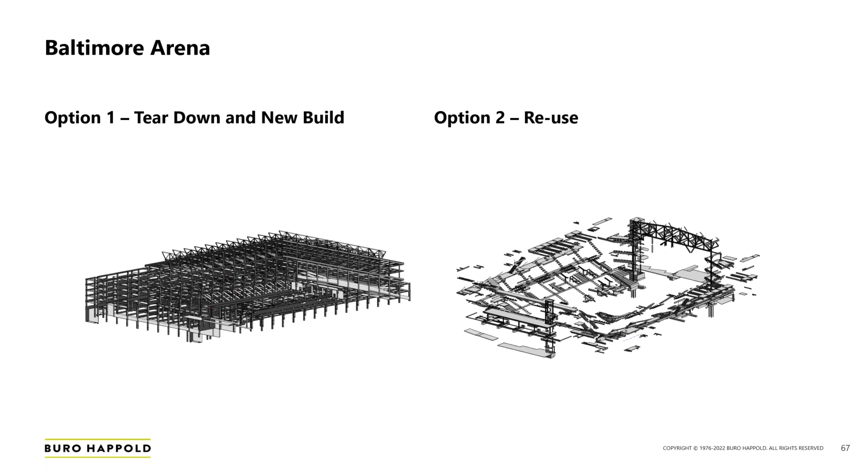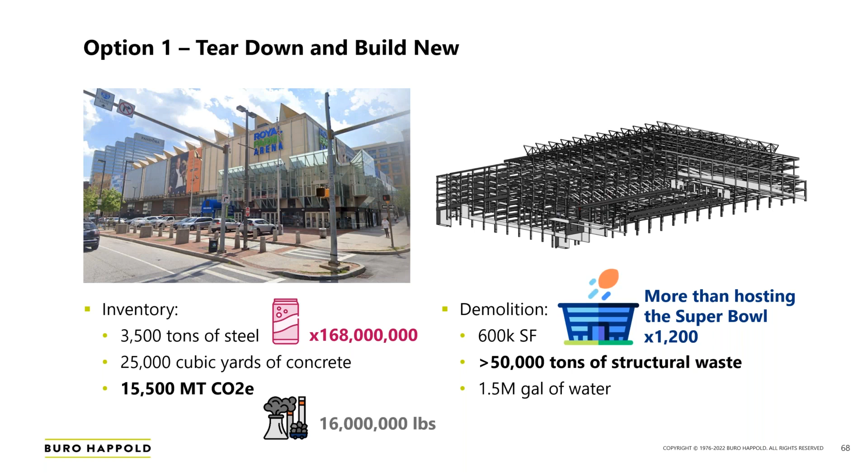The other quick case study I want to show touches on reuse. This is something we're seeing more often: showing clients how much environmental impact comes from choosing a targeted rehab approach to a building rather than tearing it down and building new. When you do these, it really jumps out how much material is in these buildings and the significant impact we have. By using this targeted approach, we're able to show significant embodied carbon savings in the structure alone, as well as mitigating a significant amount of waste that would have gone to landfill, and water used during demolition.

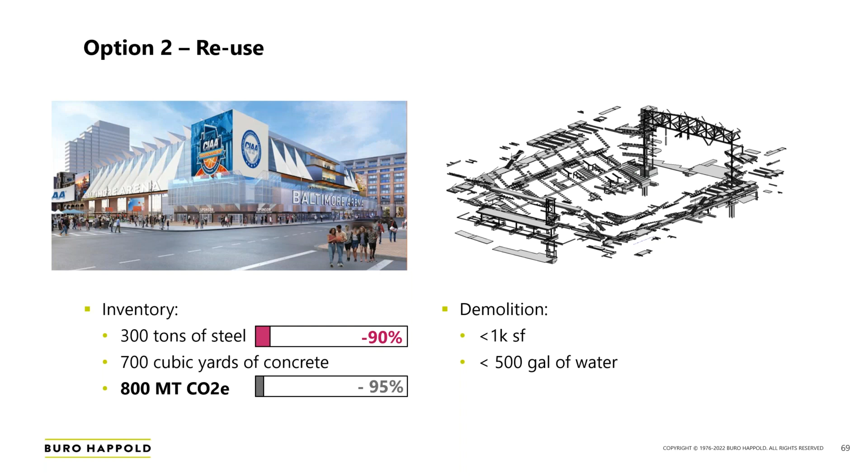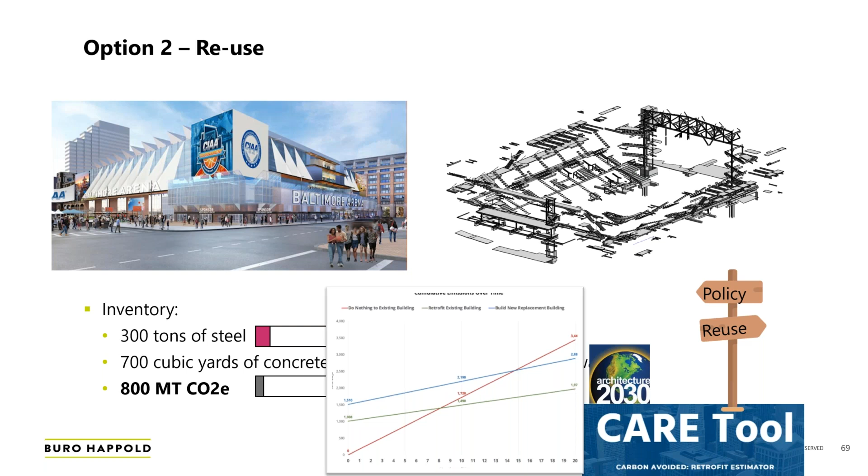I'll point to a tool that came out recently at Greenbuild for owners, developers, or architects facing these early decisions, called the CARE tool, and you can run some high-level scenarios on it.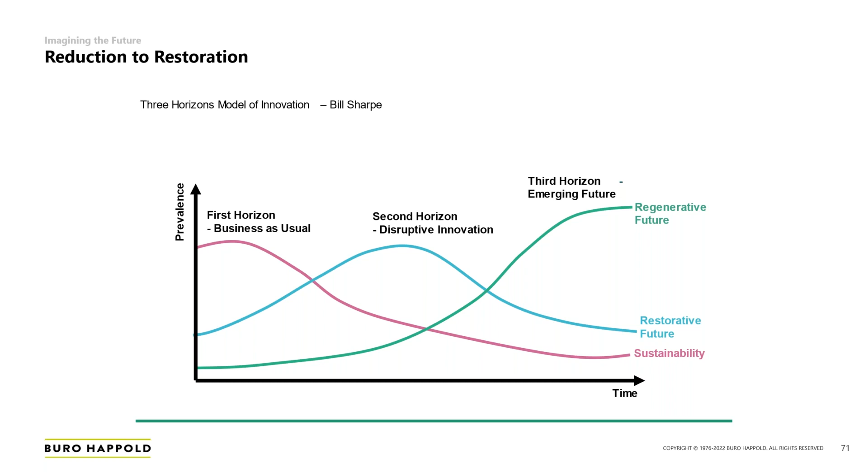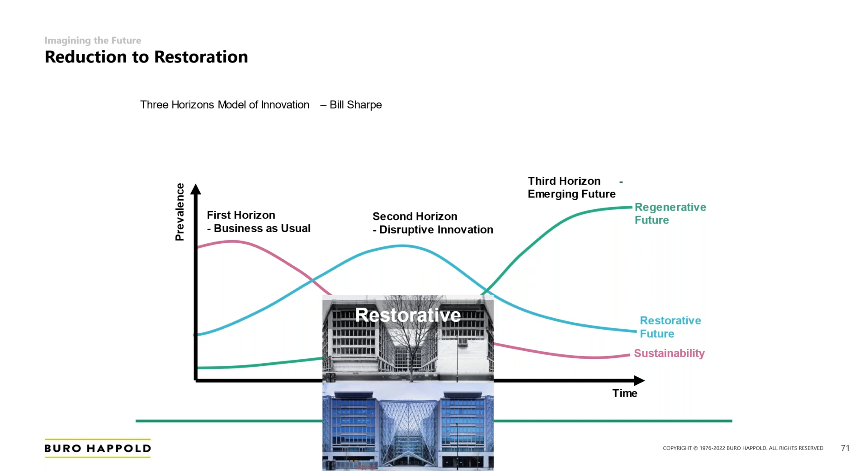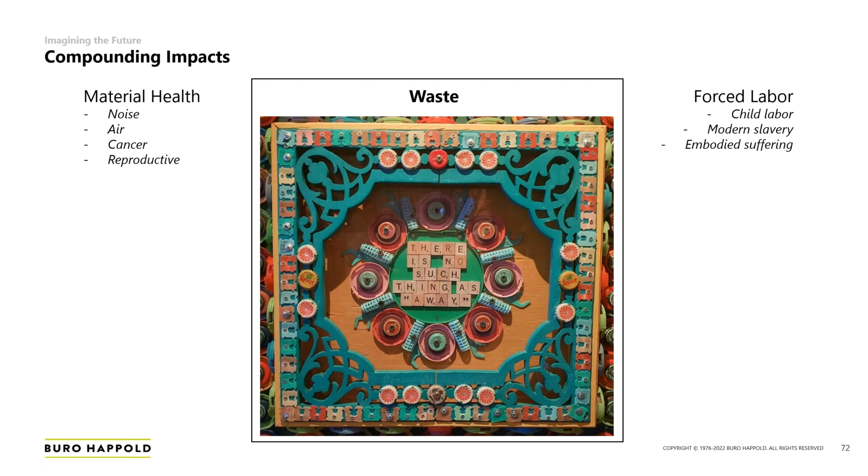So in closing, I want to look at where this is headed. Right now, we're really looking at incremental reductions in sustainability, but as we get lower on that embodied climate action reductions, as a high-level goal, I think we really want to look towards more restorative practices and even regenerative practices, and what that means to the building industry. As we go down that route, I think we'll find more and more of the compounding impacts to material health, waste, forced labor. This is not just a carbon pollution problem, where our materials come from.

It has deeper impacts. I'll leave the group with this call to action: finding hope in acting is really where I think there's a lot of potential. There are a lot of groups and people out there, and I find hope in folks like Brandon and Webley, and working with them. Hopefully there's a little bit of useful content people can get out of that.